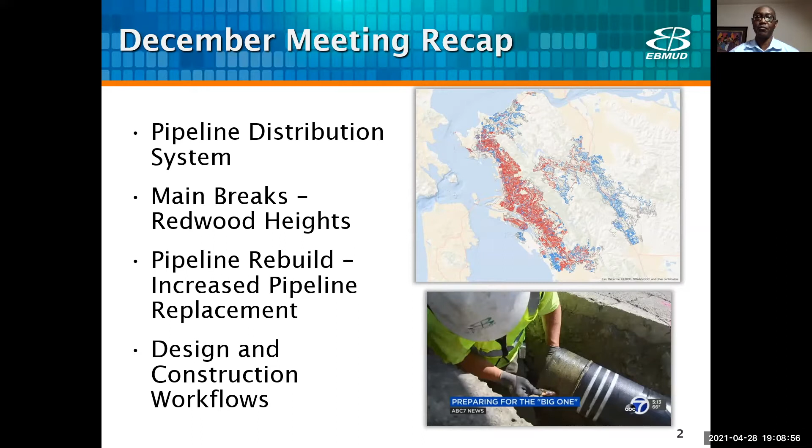Thanks, Jimmy. And good to be here with everybody tonight. So again, my name's David Katzev. I'm a senior civil engineer at EBMUD. I've been here for about 15 years. I lead what we have called here the Pipeline Rebuild Group, which is focused on all the planning and design work, really the front end work that goes into selecting our replacement projects.

And as Jimmy said, you know, we have a lot of work to do in our whole service area. The 4,000 miles of pipe that we do have, it's quite a big challenge to prioritize which pipes we really need to replace. But we have a pretty thorough, proactive process to really prioritize what are those worst pipes to replace. So let's get into what you're interested in tonight.

I'm going to go a little bit more into detail on main breaks. I think this was discussed at the December meeting, but I'm going to get into it in a little bit more depth. Talk about just your neighborhood and what kind of geohazard risks you really have that we need to consider during the design process. Going to talk about materials, what kind of materials can we put in the ground that are excellent and that are going to last. Give you some project updates, a schedule, and some next steps. So that's the agenda for tonight. Also, if you have questions, you can put them in the chat and we can get to them at the very end, and hopefully we can have a good discussion at that point.

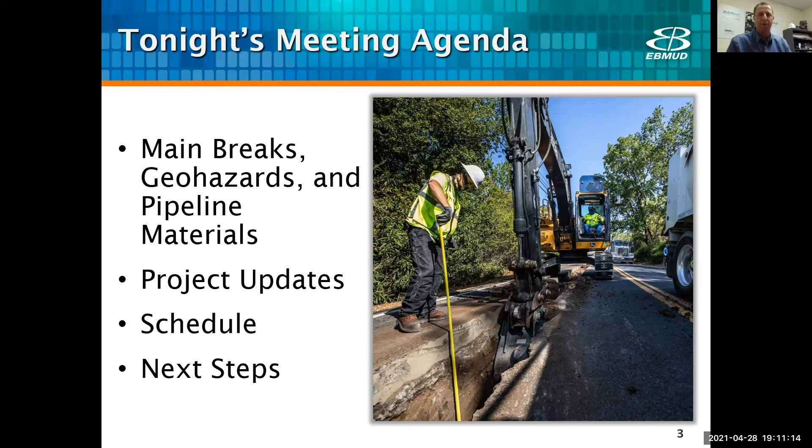This is a picture just on the right there, just to comment on that, this is really the kind of work that you're going to see coming in your neighborhood. You're going to see an excavator digging a trench for the new pipe, and typically it takes up about 1 lane's worth of work. So that's what's coming to your neighborhood.

One thing I do want to note as a main takeaway here, is even if something is old in terms of our pipelines, doesn't mean that we have to replace it. There's so many other variables that go into why we actually prioritize replacements.

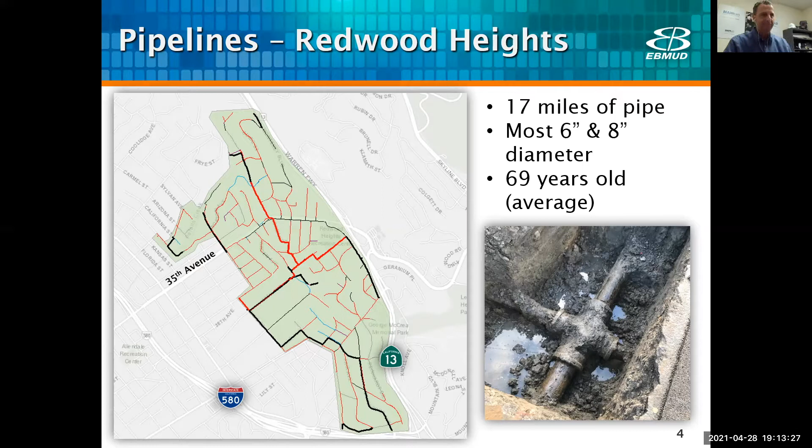And just as a district total, there were 959 breaks in calendar year 2020. So you can see we have quite a few main breaks to respond to throughout our whole service area, and this is just one area.

One thing we do in the design process is look really closely at reports on these main breaks. When a maintenance crew goes out and fixes a main break, they fill out a whole report and talk about what type of break it was, and then they also tell us what kind of repair they used.

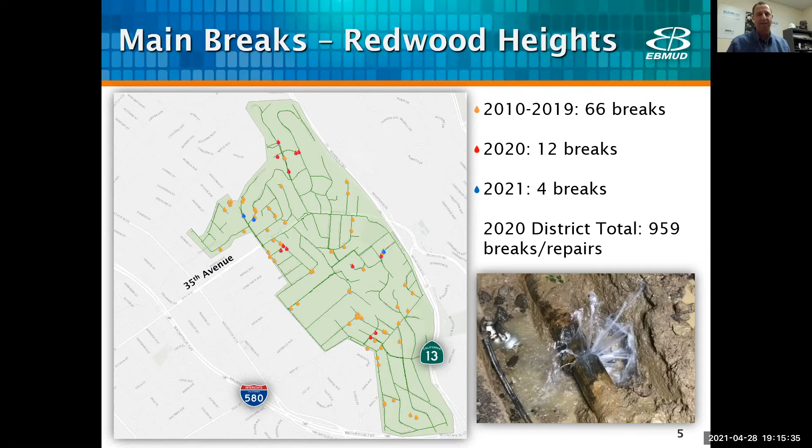This can tell me a lot about what's going on with the geology, with the soil corrosivity in the area. So my whole team takes a really close look at why these pipes are breaking in this area. I'm seeing a lot of ground movement here, a lot of breaks where the joints are pulling apart or shifting left to right. I'm seeing some corrosion combined with some ground movement - just a snapshot of what I'm seeing in terms of why these pipes are breaking.

This is a little bit of a follow-up to a question from the December meeting about maps - how are our pipes all mapped and our valves, and how do we know what to do during an event?

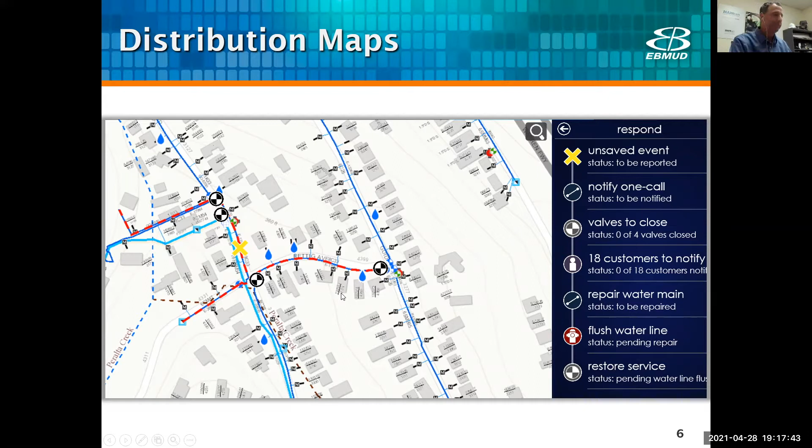So why do pipes break? First of all, corrosion - we have a lot of cast iron, 1,300 miles of cast iron pipe in our system. The iron breaks down, the material breaks down, it corrodes over time. You lose the actual pipe wall thickness and the pipe breaks. So that's one way our pipes break.

Ground movement - of course, we live in a really seismically active area. The last couple of earthquakes in the last few days, the ground moves, it shifts. And when it shifts, things get pulled apart - there's tension, things get pushed together, there's compression, or things get bent. Things move around.

Where is the tension happening? Where is the bending happening? This is really what we need to dive into in a lot more detail in terms of your neighborhood, because of the geo hazards in your neighborhood.

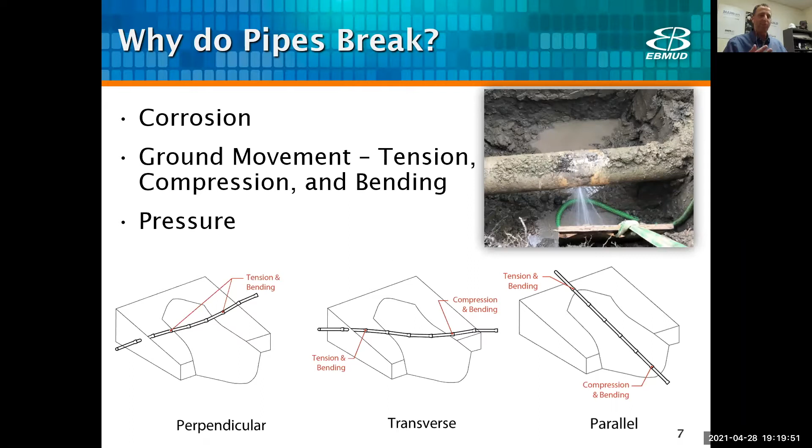The last thing that causes pipes to break in our areas is water pressure. We get surges of water pressure in our system that can cause main breaks. We have areas within our service area with higher pressure than others. If you have an area with higher pressure and your wall thickness is corroding over time, that can lead to more main breaks as well. So these are really the three common reasons why pipes break and what we consider when doing a design project.

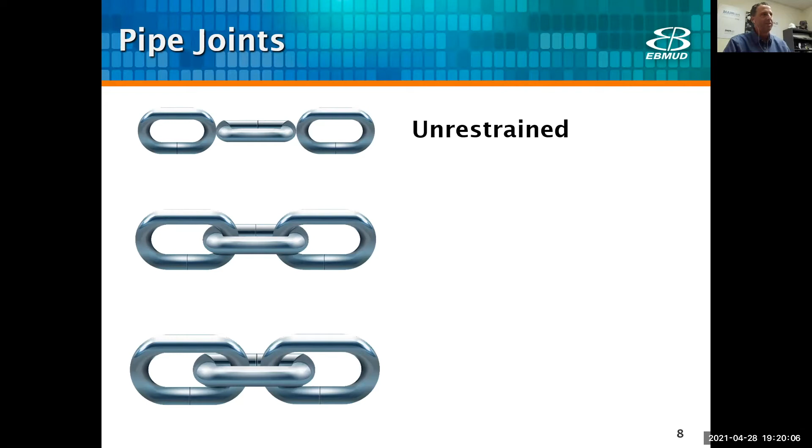So what do we have in terms of our choices for pipe joints? The first one is unrestrained. I'm gonna use this chain link here to show you what this means. Unrestrained means the pipe is put together, one piece next to a piece and another piece. It's connected, it's sealed with a rubber gasket, but it's not locked together. Believe it or not, the majority of utilities across the country primarily put in unrestrained pipe.

Around the country, next up, which is a significant improvement, is what we call restrained pipe. This is where your chain links are actually locked together, side by side. So as you go from one piece of pipe to the next, you have a mechanism to lock it together.

Finally, the next one is restrained with expansion and contraction. Here you have a chain link, the link right in the middle, that can slide back and forth. This is really the ultimate solution. This is one pipe piece put together with another and another, with the ability for the pipes to move back and forth at every single connection point. That's really what we strive to put in where we have the highest risk related to ground movement: the restrained with expansion and contraction.

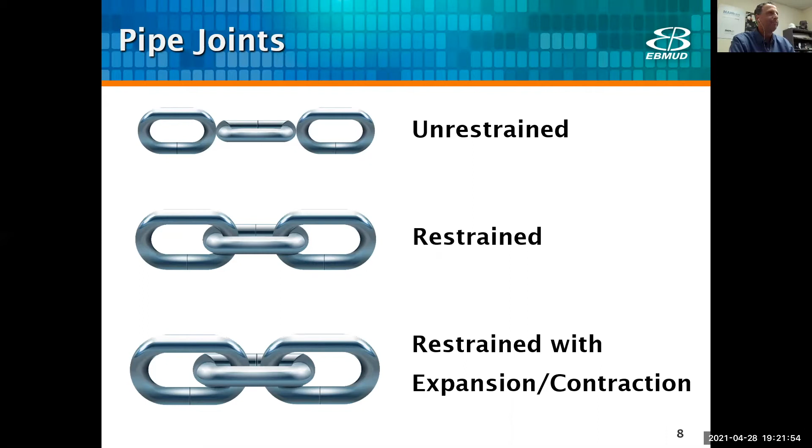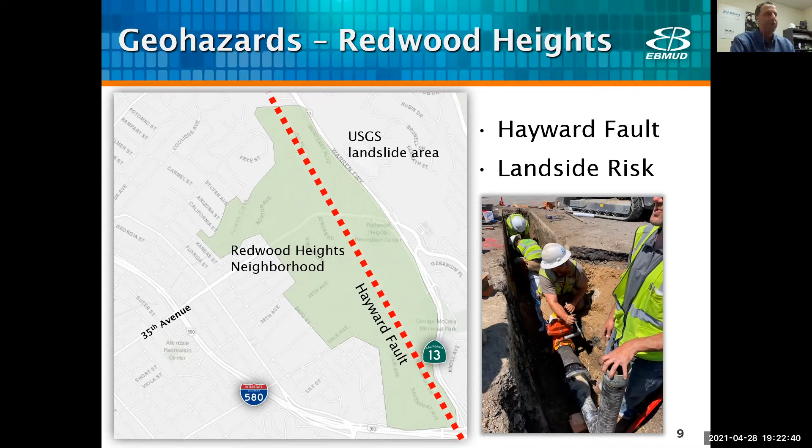So how do we know what are the best solutions, what are the best pipe materials? This is something I actually think EBMUD is really at the forefront of. In the past five years, we've done a lot of work testing different kinds of pipeline configurations to see how they respond in different ground movement scenarios.

We work with Cornell University. We also work with University of Colorado at Boulder on testing some plastic pipe. Surprisingly, some plastic pipe together with some fittings can also be seismic resilient, can also move around and shift and not break and not fail during a ground movement event.

So what are we doing in EBMUD? We're really focusing on ductile iron pipe and earthquake resistant ductile iron pipe as being very hazard resilient, with proven results from these universities, and something called iPVC pipe, which is a plastic pipe that also has some seismic resilient capabilities.

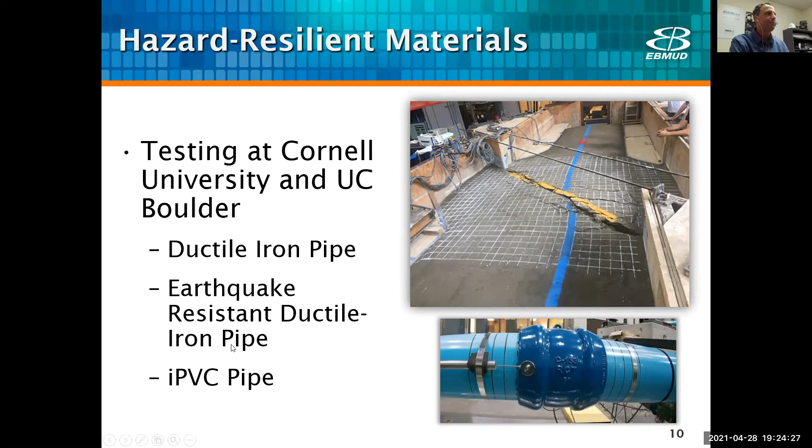So what we're going to do in your neighborhood is with ductile iron. This is where I get into a little bit more detail on the materials. What's coming into your neighborhood? What's going to be installed? The first one is restrained joint ductile iron pipe.

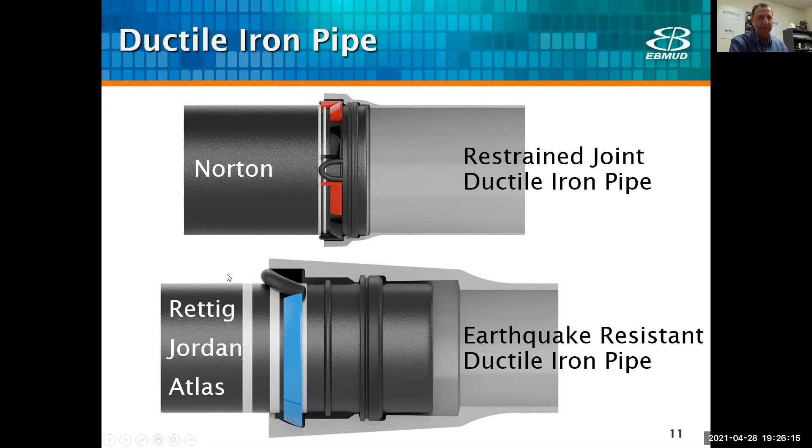So we've actually targeted what we call the Norton cluster, and you're going to see that in a later slide, for this restrained joint ductile iron pipe and the earthquake resistant ductile iron pipe, for Rettig, Jordan, and Atlas. These are exceptionally good pipe materials. I can assure you of that.

So let's get into projects now. Here's where we're at with projects. Recently completed, Harborview was a while ago, that job was done. The Quigley cluster is pretty much wrapped up. It's not within your neighborhood, but it's very close. But let's get into what's happening right now in my group.

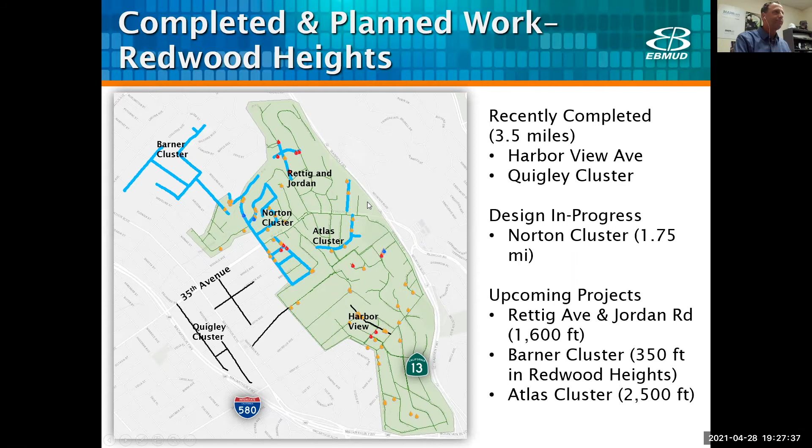It's made its way to the US, and I think it's a really good advancement that the ductile iron companies are doing right now. What are we replacing? Mostly 1920s cast iron pipe in this neighborhood. So that's our first project right there, it's called the Norton Avenue Replacement Cluster.

Oftentimes we just kind of pick a street to name these clusters, maybe where we see the most main breaks. We really don't have a really good rhyme or reason to this. Actually, on a kind of funny note, I have 2 women engineers and they like to pick women's names for our replacement clusters.

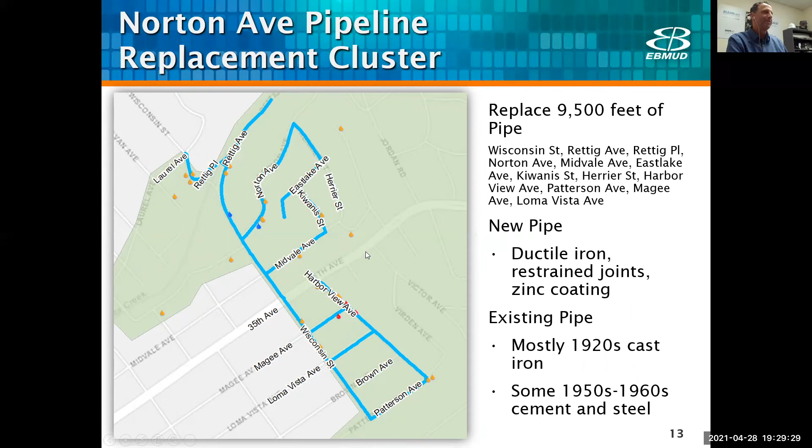So we're going to put in ductile iron earthquake resistant joints. For both these streets, you're going to end up with materials where at every single joint you're going to have that little movement back and forth.

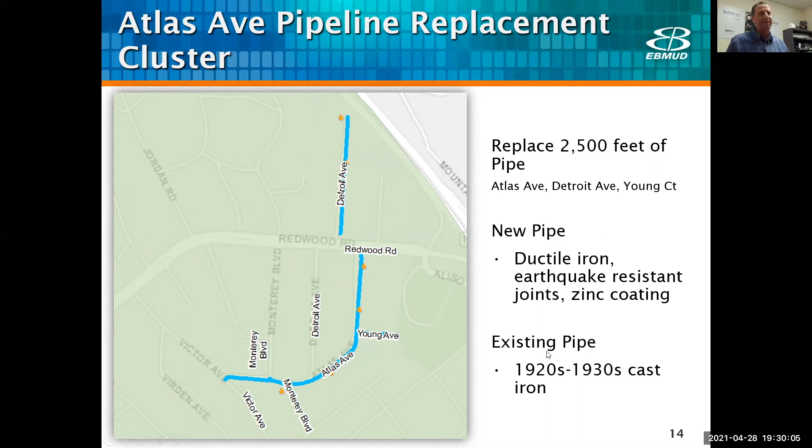And again, existing pipe is 1920s to 30s cast iron.

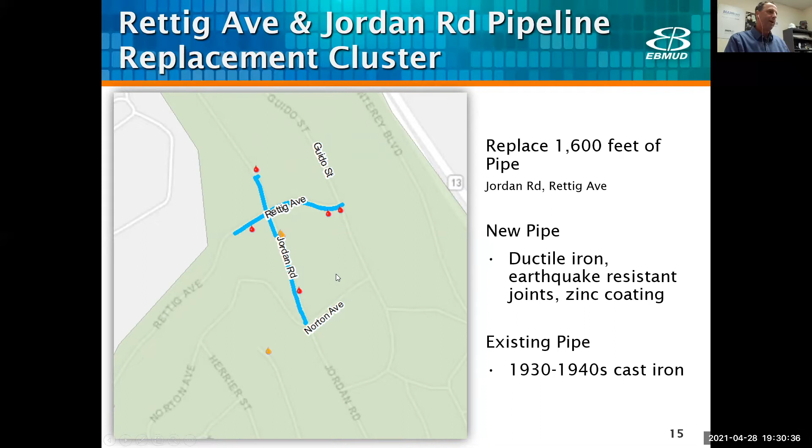So those are the 3 projects we have in the works right now. So where are they at? The Norton replacement cluster: planning is complete.

What's planning? We look at all the hydraulics, we do the right pipe sizing, we get out there and do some survey work, we collect all the utility as-builts. We do a lot of work in the very beginning before we can jump into design.

Our goal is to complete design by June 2021, so just right around the corner, with a goal of hitting construction in the fall of 2021. I just want to note these dates for construction are subject to change. They're approximate right now.

We have 12 different construction crews around our service area, and sometimes it's a bit of a juggling dance as we move them around. But that's our goal right now, to get out there in the fall to start this project.

The Atlas job, the planning is done. We're hoping to get design done this summer with a goal of getting out there in the winter for construction.

And then finally, the Rettig Jordan replacement cluster. We're doing the planning, we're kind of in that stage right now, with a goal of finishing our design by September, and then essentially a year from now to start construction. So that's our schedule with those 3 projects.

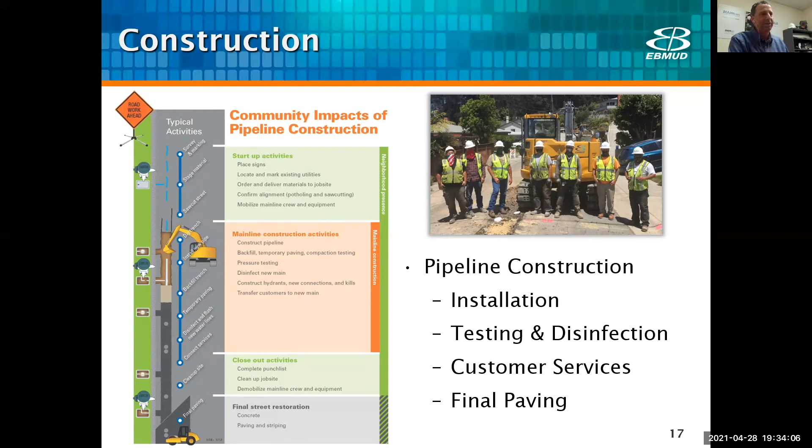After all that work is done, then we come out and do our final paving, and we coordinate this with the city of Oakland. That's what you can expect with construction.

So what's next up for us? In design, we have a lot of work to do right now to complete our projects. You're going to see us out in the neighborhood a little bit more doing our job walks. We'll come out for the Atlas job to do a job walk, and we'll probably come out a few times to do the Rettig Jordan job.

There's some challenging things with that job, so I was out there the other day. I think you'll probably see me more often out in that area. There's lots of coordination and permitting to do. We want to make sure we're coordinating with other utilities and with the city in terms of their paving plan. So we do a lot of work in terms of coordination before we actually get out there for construction. There's the permitting part, and then there's scheduling construction.

And so that's it, that's really where we're at with our projects. I know there's been a lot of main breaks in the area recently, a lot of concern, but I think we've got some good plans to come into your neighborhood and put in some pipe that's very hazard resilient and that's going to last.